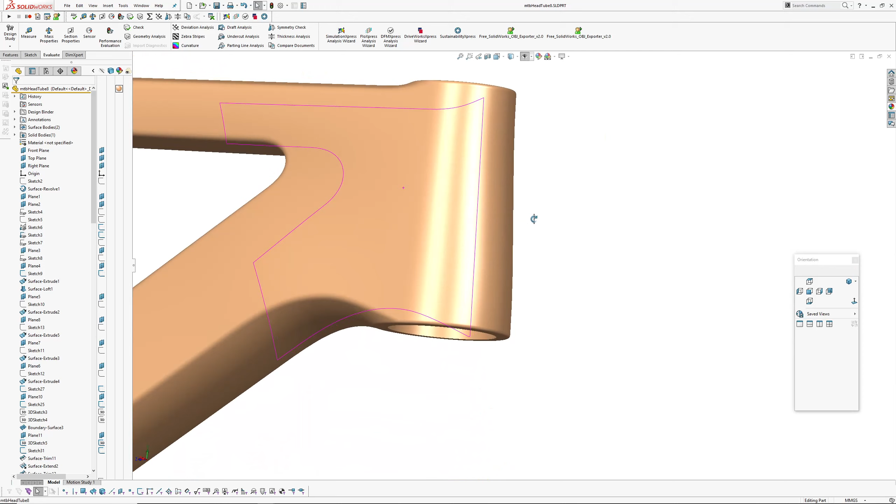Another video continuing my recent series on blends and transitions, covering different ways of doing things. I had a question from someone online about combining a bunch of techniques together, so I've dusted off this old mountain bike head tube, top tube and down tube exercise that I've been dabbling with for a few months, and never actually sat down to flesh out properly.

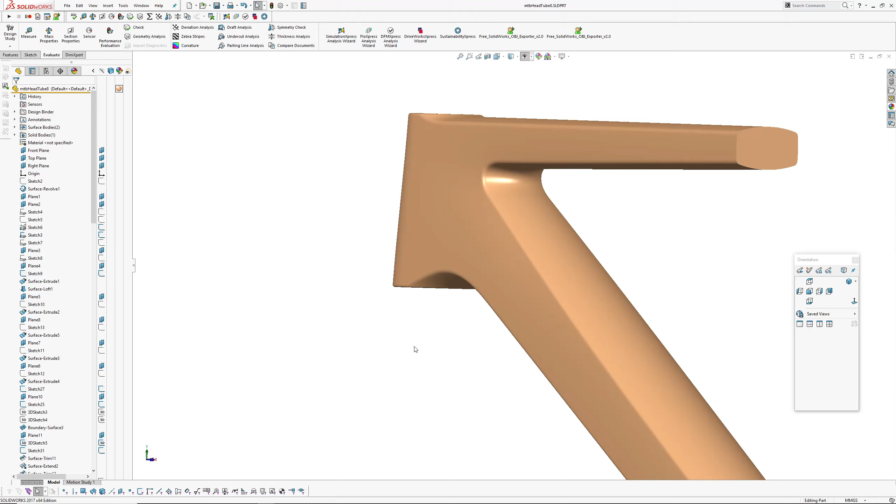I've got a series of models here showing the process I went through to achieve this result. For people that don't ride mountain bikes, the new standard most mountain bikes have is a tapered head tube, 1 1/8 on the top and 1 1/4 or 1 1/2 on the bottom, I can't remember exactly. So you've got this tapering hourglass shape at the front, and then your top tube and bottom tube, blending everything in nicely together.

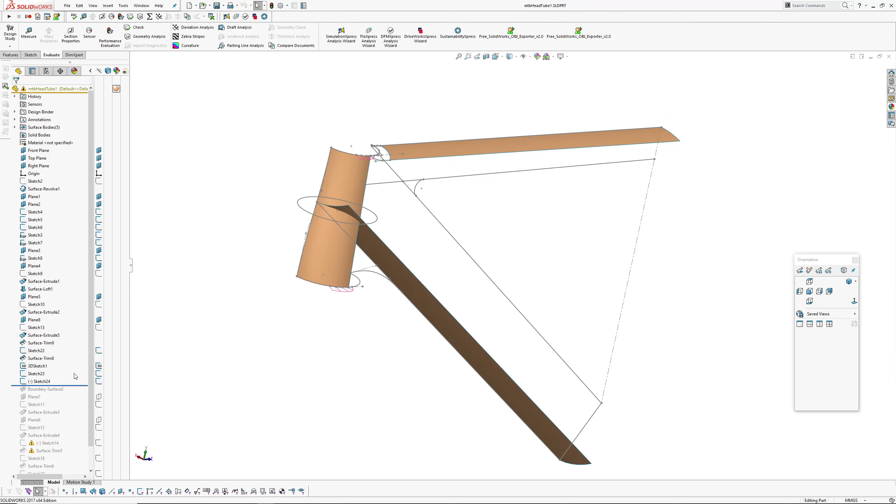As you can see, I'll roll through a few files here and show some things I tried doing, things that didn't work. There you can see the patch layout. I'll roll up to the top here and cover a few things.

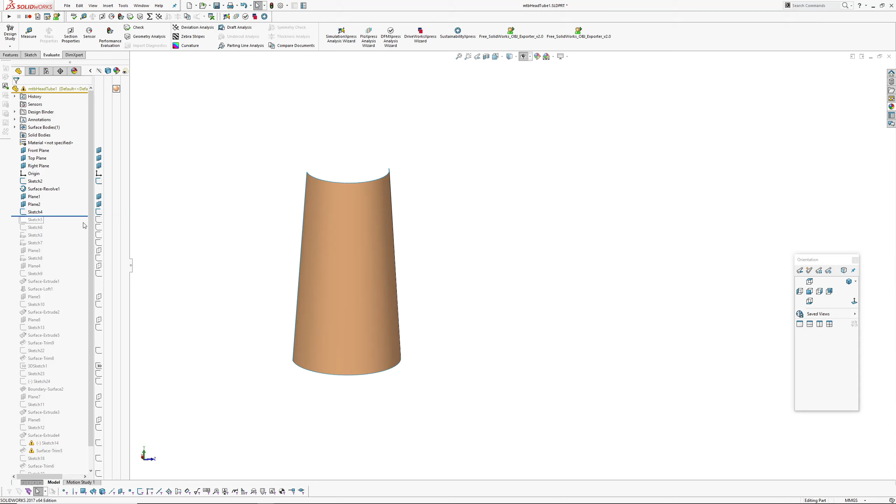So I created a revolved surface, which is my main surface for the headset, for the head tube. I create planes at the top and bottom, and then I've created my main layout, the centerline layout. So a bit of taper on the down tube, taper on the top tube.

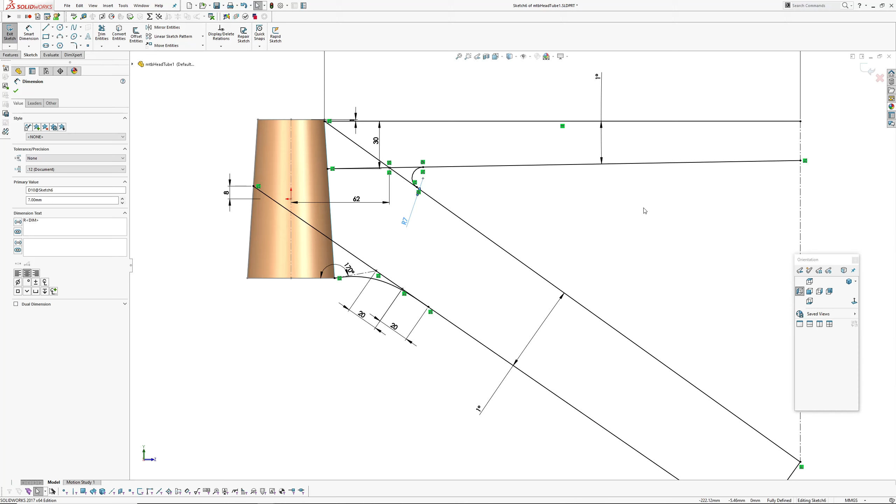Just a guide for the blend here, and then I've started creating my hourglass form for the head tube. This revolved surface here is just a guide, so I'm going to hide that. For my hourglass, if you look at several mountain bikes, they have this kind of hourglass thing going on rather than just a straight transition. This is no particular bike, it could be a cross between a Santa Cruz and something else, it has a similar look.

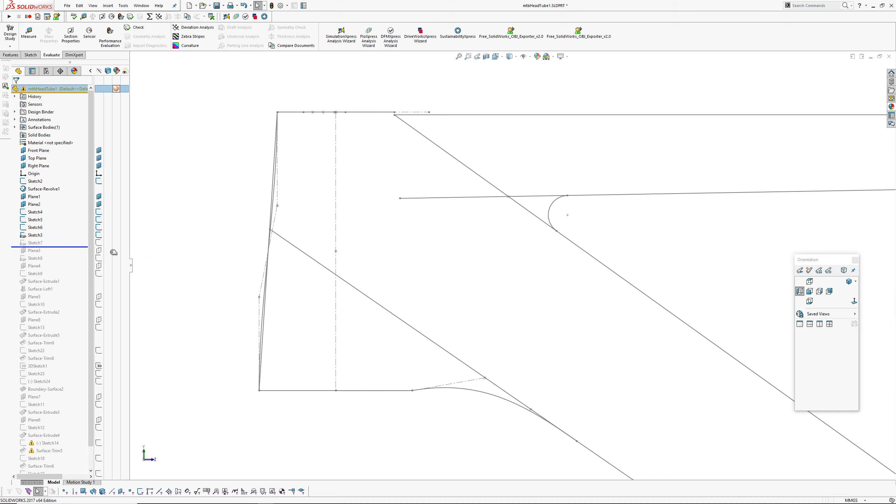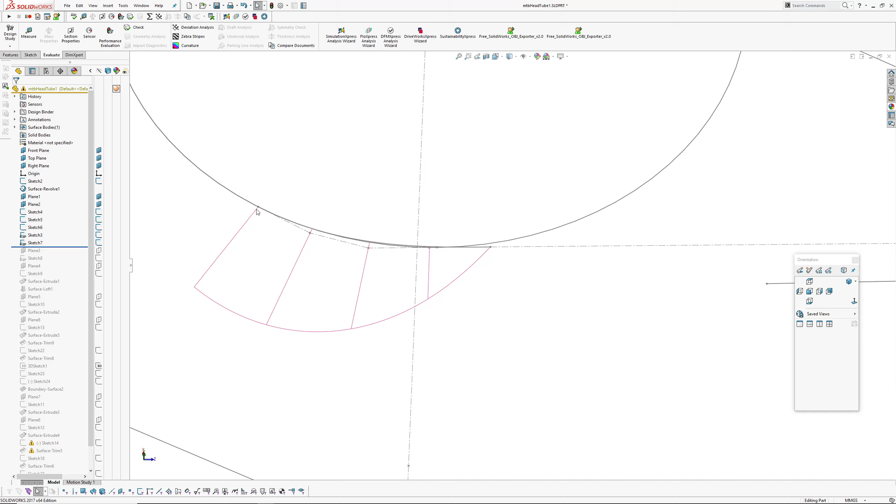At the top, I'm not just going to use a cylinder and try to blend in with a tangent, I want to make a curvature continuous join. What I've done, if you've watched any of my other videos, is have an arc and blend that arc to a line using a style spline. That style spline, if I select it, is a degree 4, so it's got 5 CVs, curvature continuous to the arc.

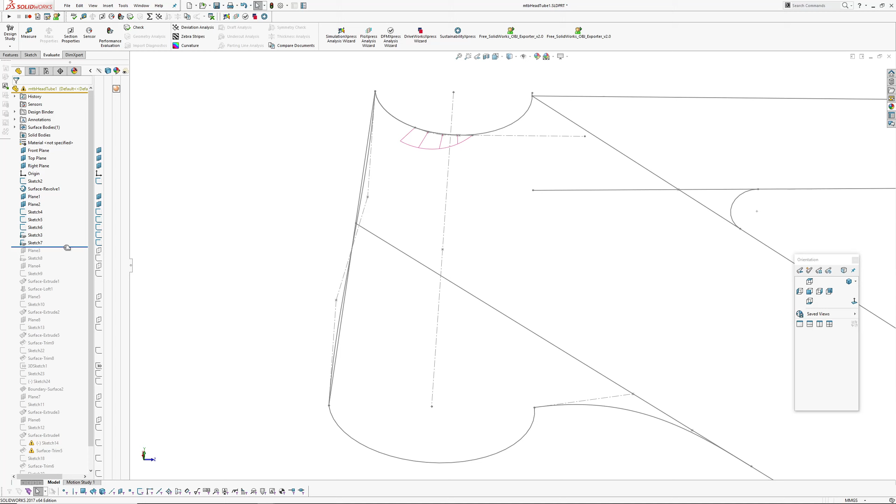So I've got 1, 2 points taken up with the curvature continuity on this end, and these control polygon segments are collinear with my straight line, so they're horizontal. Then I've done the same thing at the bottom. You can see I'm going to create a surface between those two, so there's my planar surface where I want to create a blend.

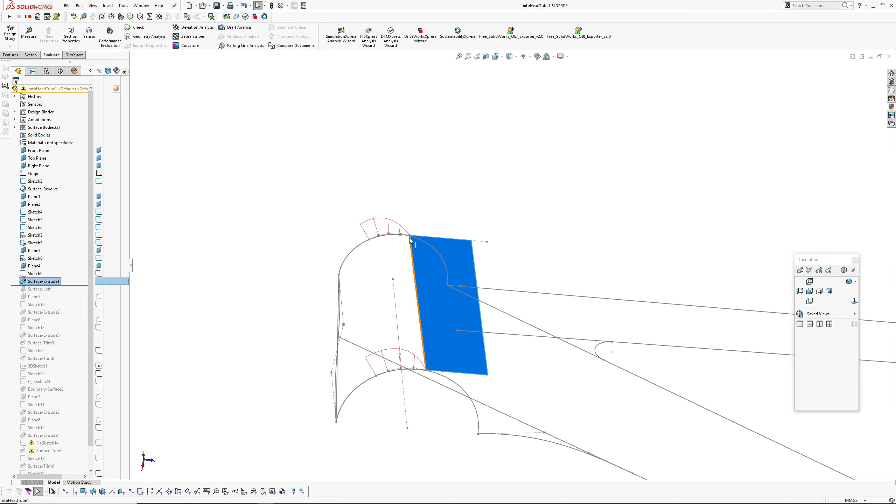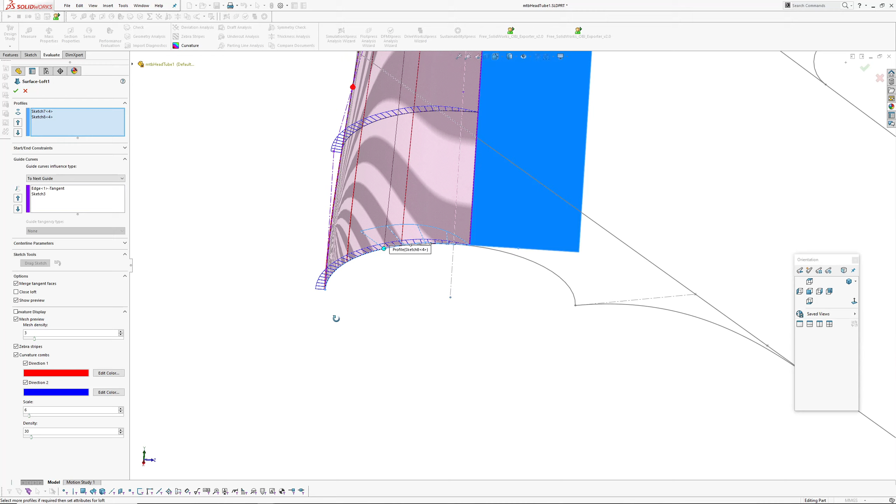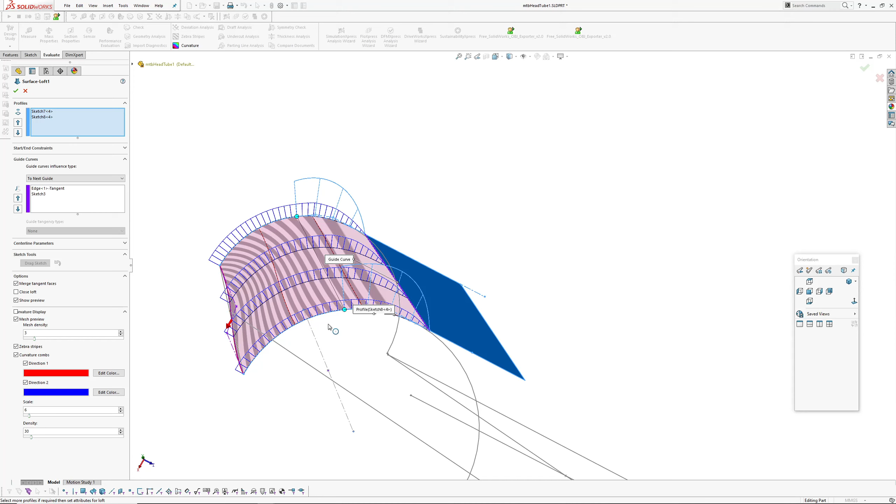So we can go curvature continuous. The curvature you can see with the graphs there is dropping to 0 where it hits the planar face, and this section forward of the graph is an arc. I've just created that with a loft. On one end we've got this hourglass thing going on at the front, and on this end I've got my planar face, and the curvature is coming around as an arc and then dropping to 0 — well, approximately an arc because I've got an hourglass form here. Right, I better speed up.

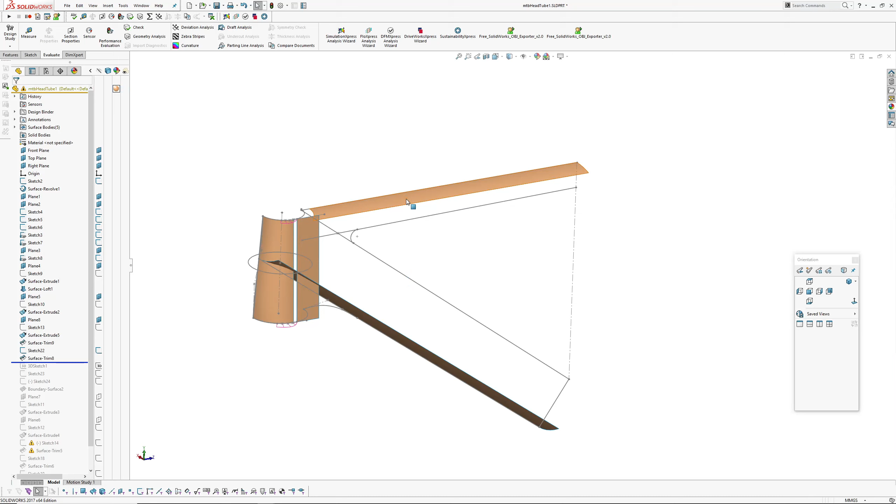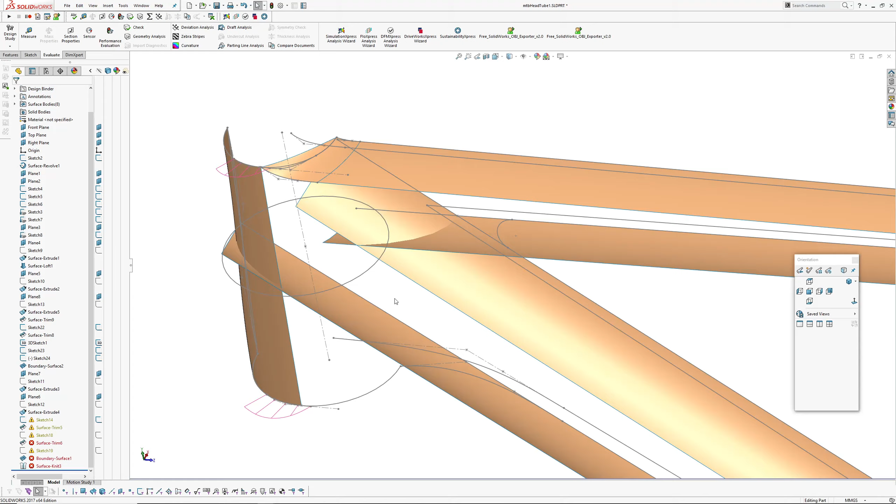Now I'm just going to extrude some surfaces — top tube, bottom tube, main faces, which are just crowned. So this first version, I had grand plans of making these surfaces here and creating the blends and then patching everything in. But it turned out to be a bit of a grand failure doing it this way, because I've got to transition from here through to two branches, and it's all over the show.

I haven't actually intersected my primary surfaces first before I started trying to get this blend going on, so I figured this was not the best way to do it. So that's where I moved on to version 2, which you can see is quite different. What I've done is decided to create a larger overbuilt surface that gets trimmed back, and I'll go through this.

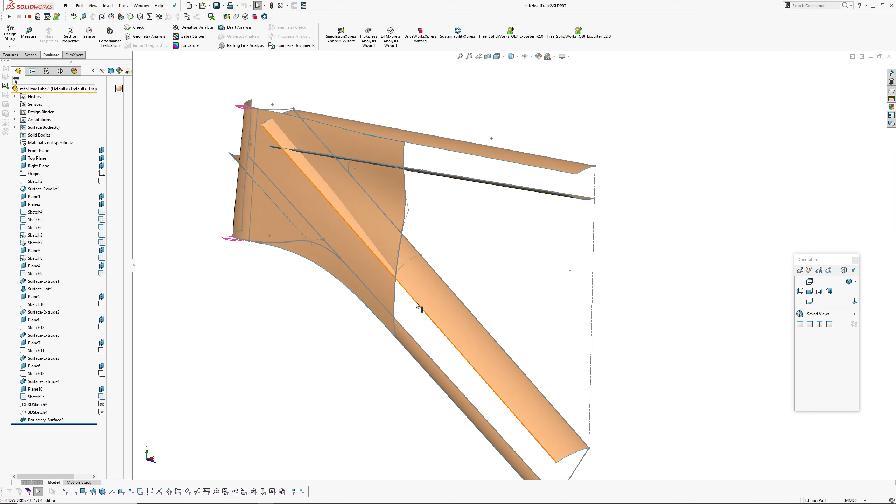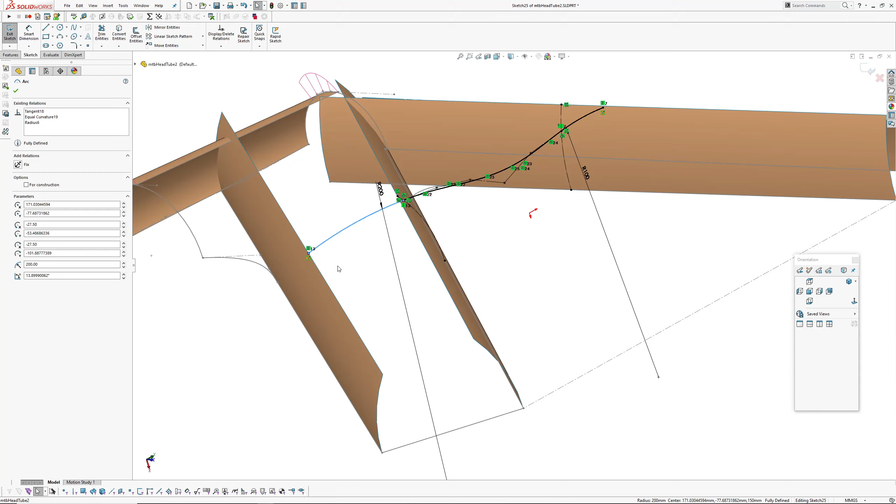So I've created a plane at a point. This is an offset from the front plane, and then if I go into the sketch here, I've got an arc for the crowning on the down tube, an arc for the crowning on the top tube, and then I've joined them together with a degree 5 style spline, curvature continuous on each end to the arc,

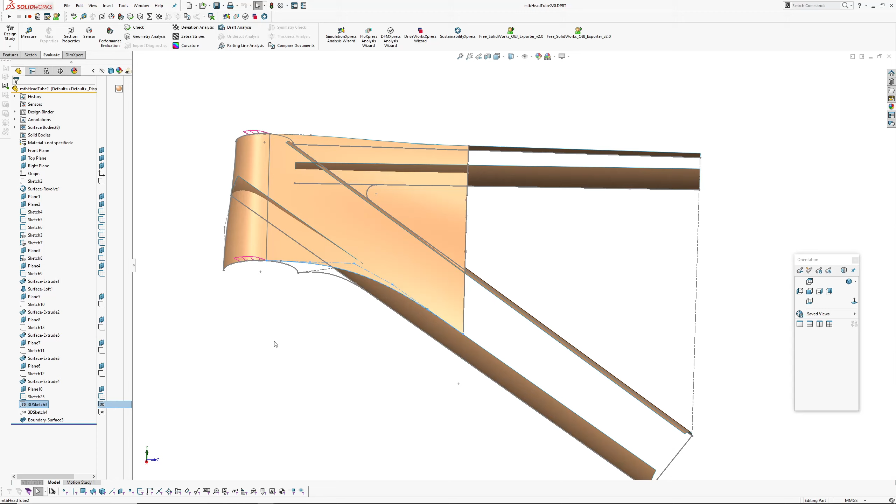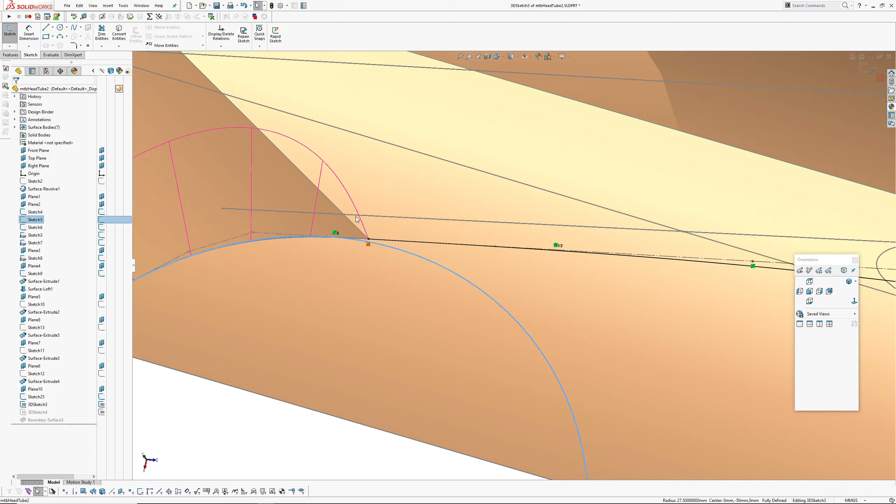and then created some side profiles to blend, because what's going on here, I'll show you. So this is the arc. If this was a true revolve right round, so there's this section of arc segment there, and then I've got a curvature continuous blend running it out so I can run straight back from this point, because if I just chop the arc here, I'm going to end up with a tangent connection.

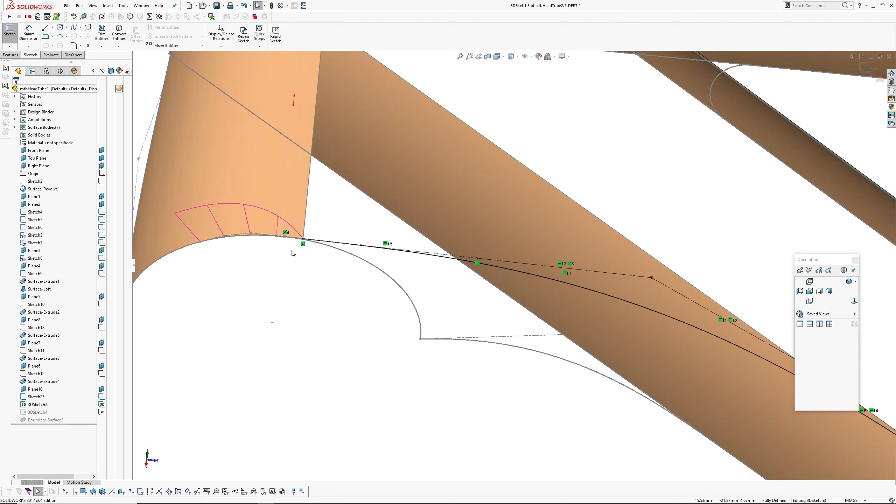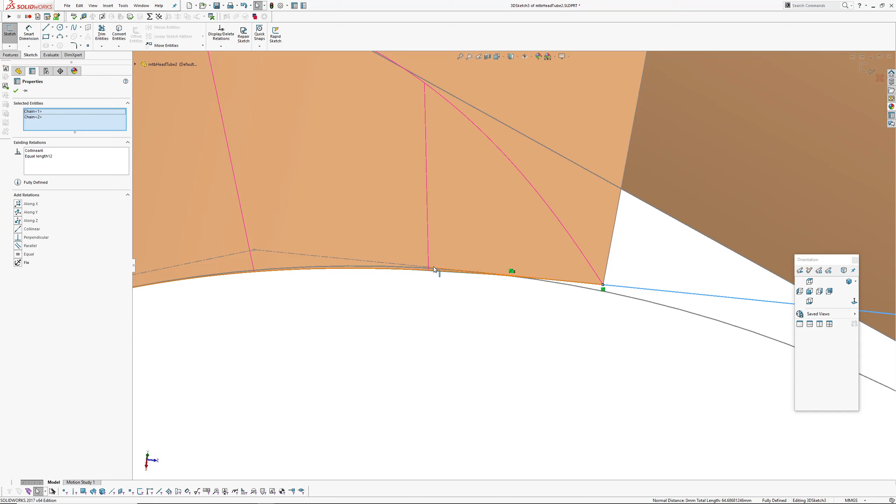So from this surface, which is the loft I created earlier, I've got a 3D sketch with a style spline on it, degree 5, 6 CVs, curvature continuous at this end, and by making it curvature continuous, I haven't actually used the curvature continuous constraint, because the curvature drops to 0 on this surface. I'm also doing the same here, so these control polygon segments are collinear with the control polygon segments on the spline here, so that's straight, it's all straight. And the same thing happens here.

The side of the down tube is linear, so these two control polygon segments are collinear with the side here, which gives us a curvature continuous constraint. Okay, and I've done the same thing up the top, as you can see. And then yeah, I just made a boundary blend. So, whoopsie.

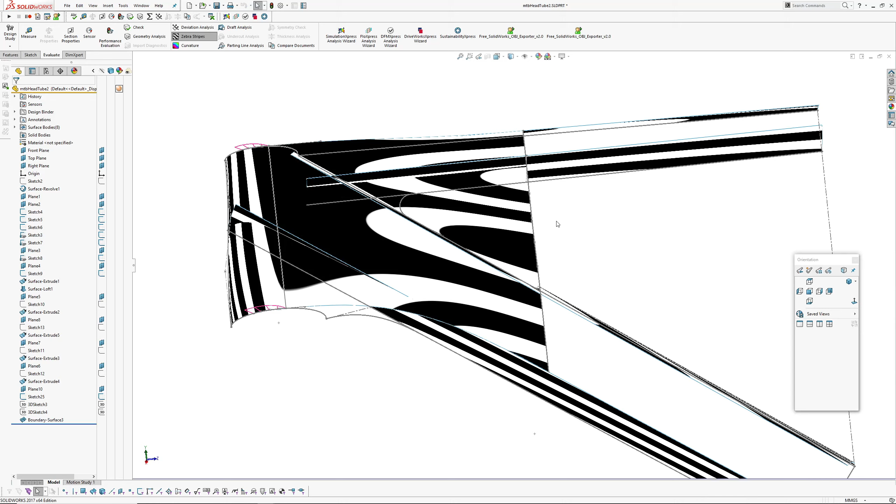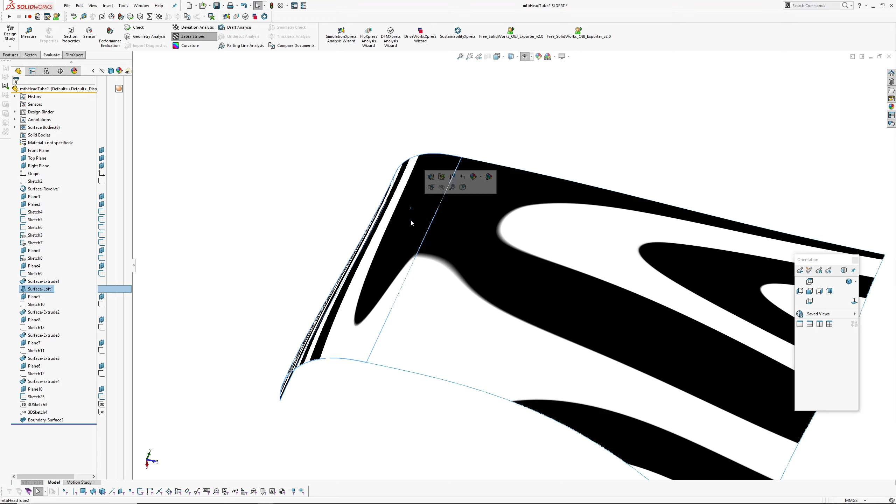So that appears to be, trying to read the zebra stripe there, appears to be curvature continuous to the head tube surface. So the idea would be then to trim out this section here. Right, I'm going to go on to the next file now.

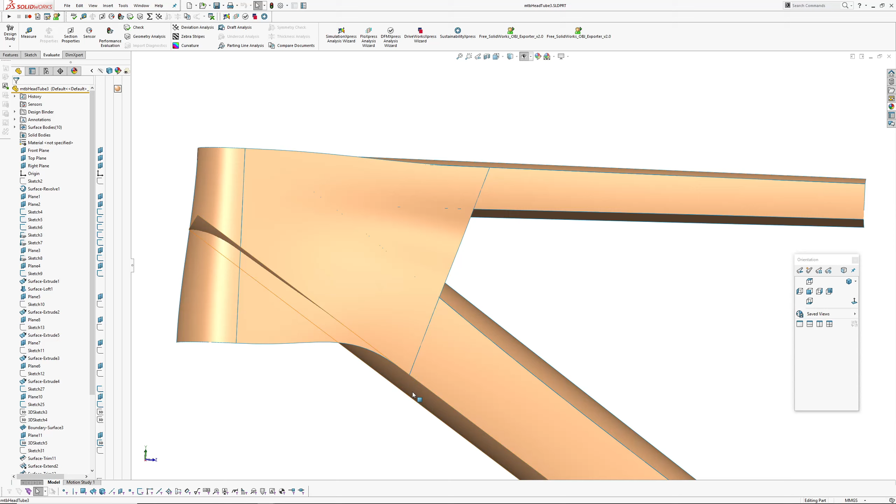So what I learnt was I don't want to have that surface as in the previous file. It was vertical here. I want to get a bit of angle here, so we're not such an acute angle to the down tube. So I've redefined things down the bottom of this tree, but it's pretty much the same. This end section still has crowning on it. So after I did that, I'm going to put in the side surfaces of the down tube and the top tube.

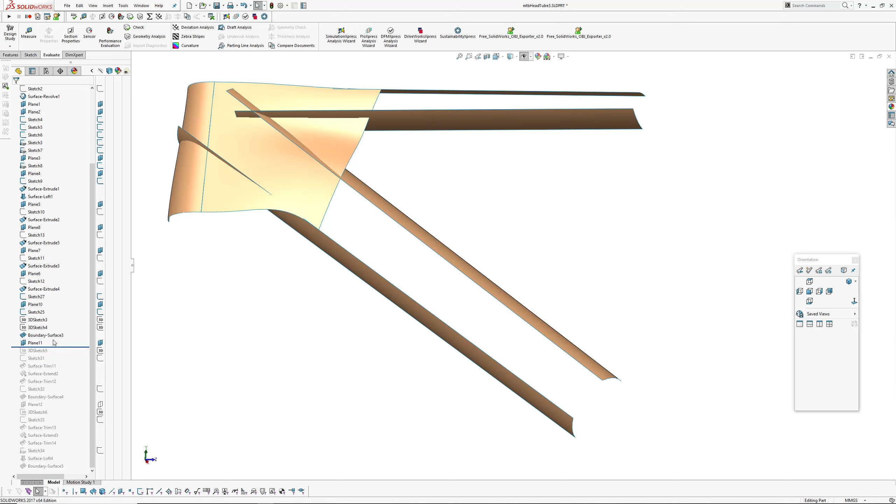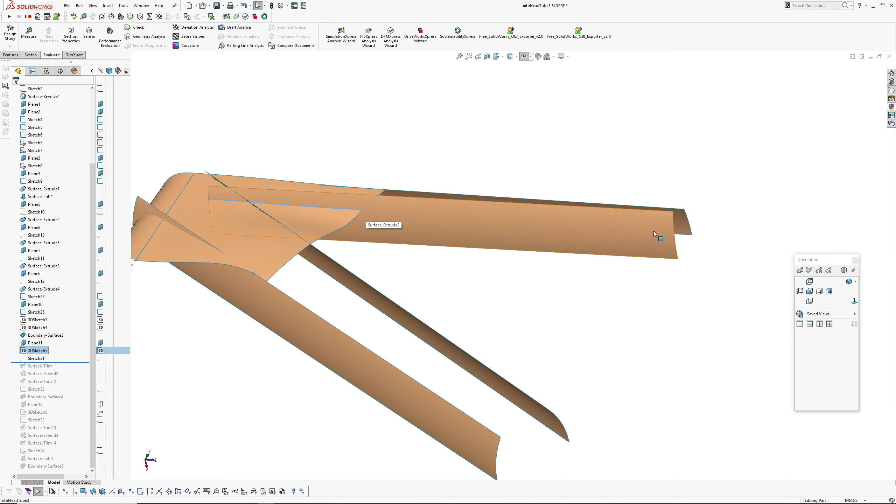So because this surface here is undulating, the bottom edge of the down tube isn't going to be linear. The top edge is linear, so this curve here, I have to define a spline through here, which is curvature continuous to a 3D sketch here, which is an intersection of this face and this face. That's curvature continuous. I've projected that down onto a plane, and then on this end it's coincident to the point on the top, because I want the top tube to be the same width by this point.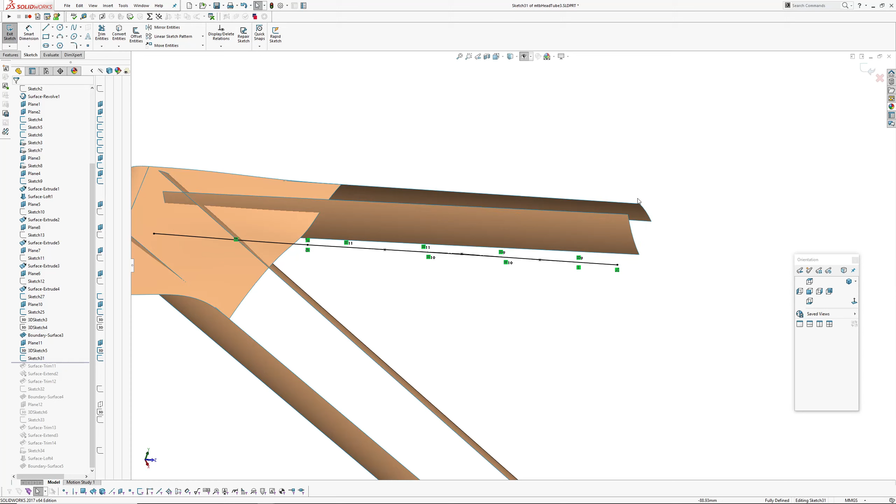Okay, and I've done the same thing on the bottom, and then I've used that to trim that surface back. I've done the same thing on the bottom. Then I've just created a crown face here, so it's got an arc on this end. And if you remember this surface here, that's got a crowning of 100 as well. It's on an angle, so it's probably not 100 exactly, but

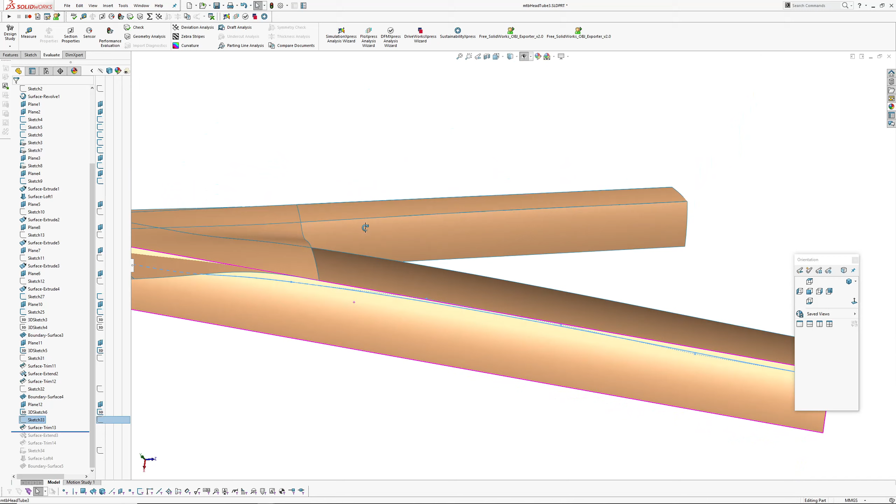okay, now I'm doing the same thing on the bottom. I've got to create an intersection between this face and this face, and then create the curve. Oh, and as you can see, this was the problem with this one. This one bellies out because this surface is too far forward at this point. So that's why my trim curve here, it's bellying out, which is not a thing we want.

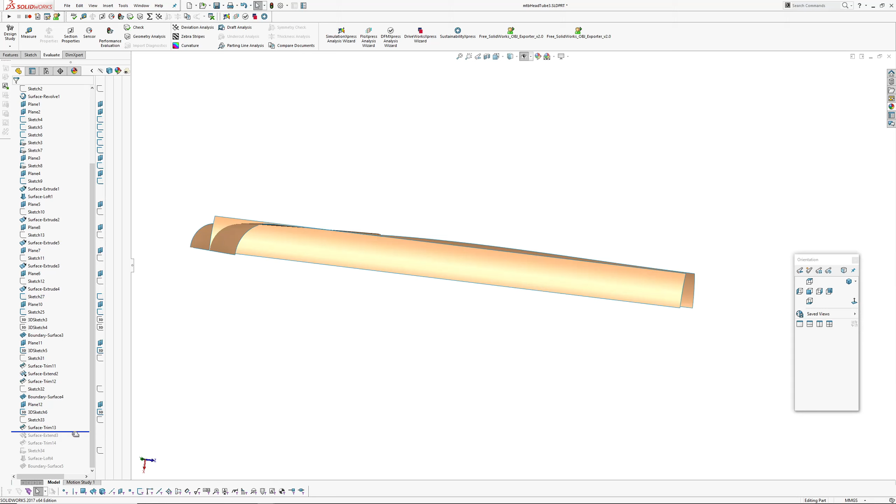So I'll go into my next file where I've updated things and got around that problem by controlling the surface and dropping this backwards. Okay, number 4.

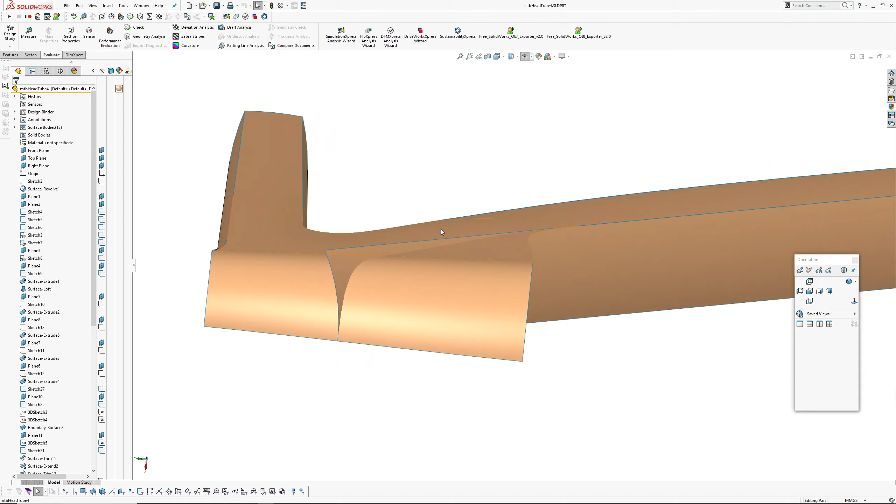So in the previous file, that surface was bellying out. I'll just turn edges on, because my big overbuilt surface here was too far forward at this point. So I redefined the sketch controlling that, so I can control the dimension here and here.

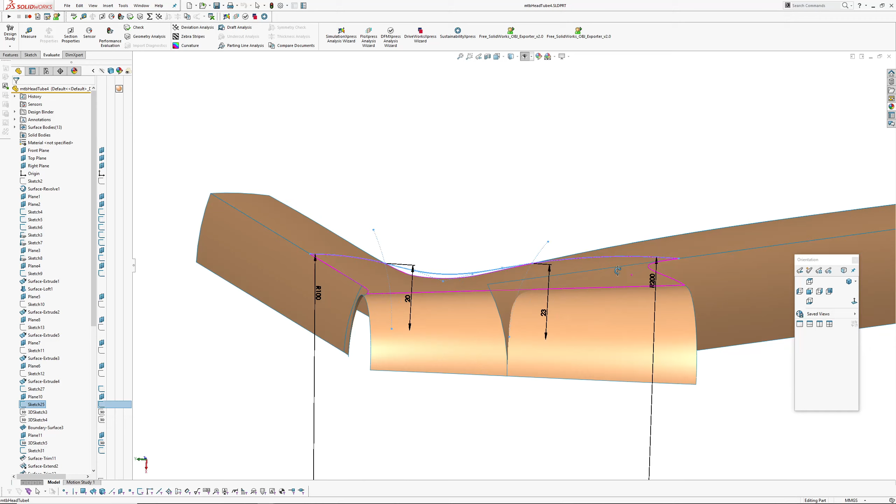So there I've got my crowning, but it's not equidistant from the center plane. So you can see the whole thing sort of drop down more, and then that has allowed this and this face to not sort of belly out.

I really must specify my recovery directory.

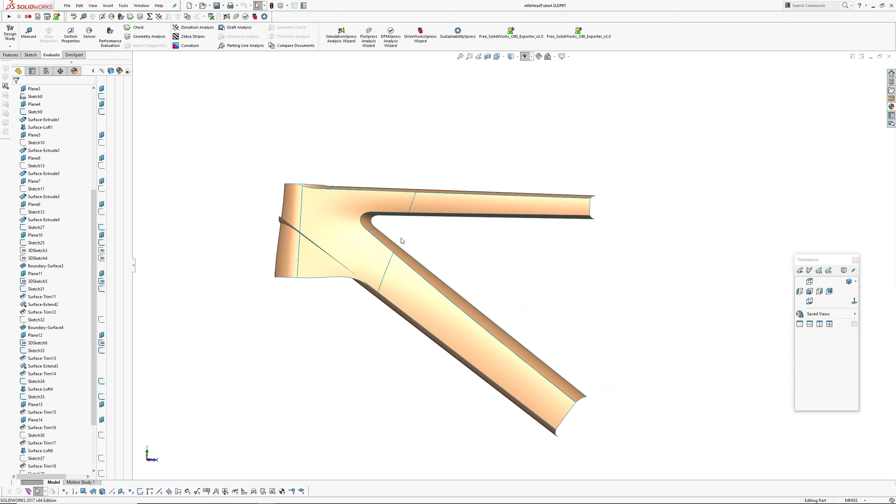Okay, what else have I done here? I've got my overbuilt surface, and I have created a blend for the center line, and then from the endpoints of that blend I've created some planes, as you can see, and then started trimming back the inner faces of the down tube and the top tube.

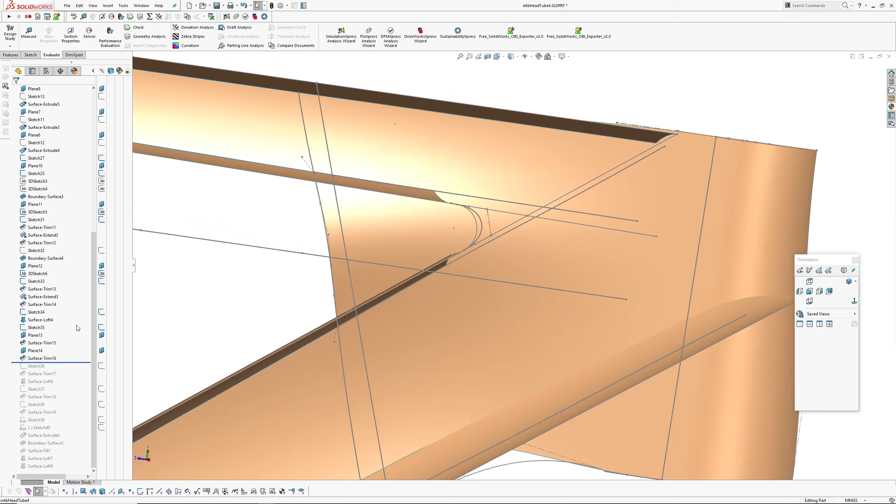And then I've created a sketch which is the outside trim, which trims back my overbuilt surface to create this elbow, and then I've created a loft in there. I tried various surfaces. This loft seemed to be the best, so if I bring up my zebra stripe, so okay, let's move on. What we got now?

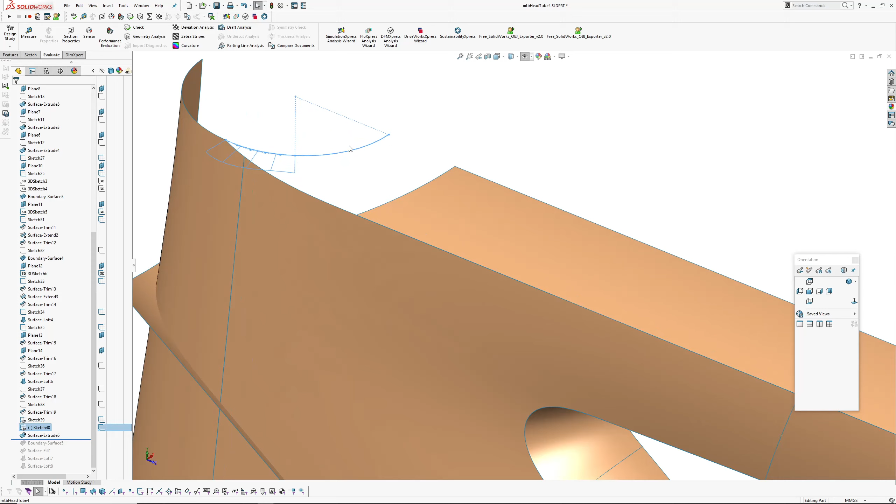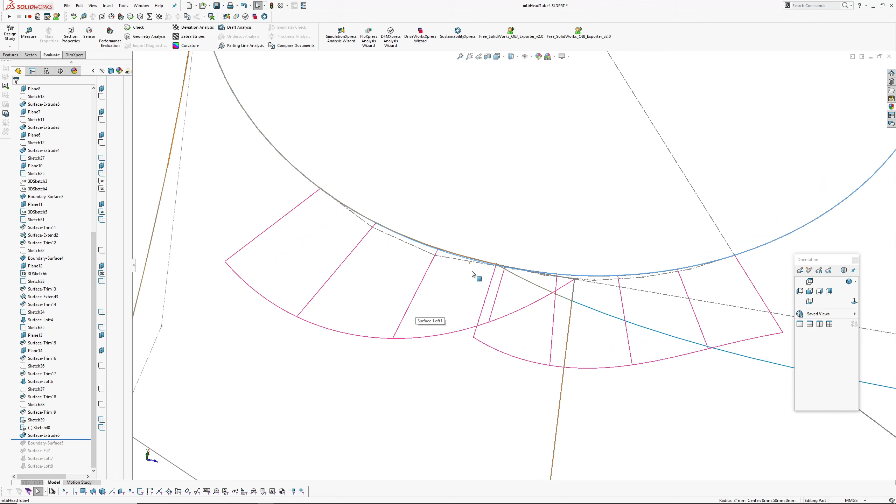Okay, started looking at the top here, trimming back this overbuilt surface, and again, what I did with the hourglass surface on the front, how it has a segment of an arc and then it transitions into a spline to go to zero curvature. I've had to do the same thing because my arc doesn't actually, there's the arc, so my surface is inboard of the arc.

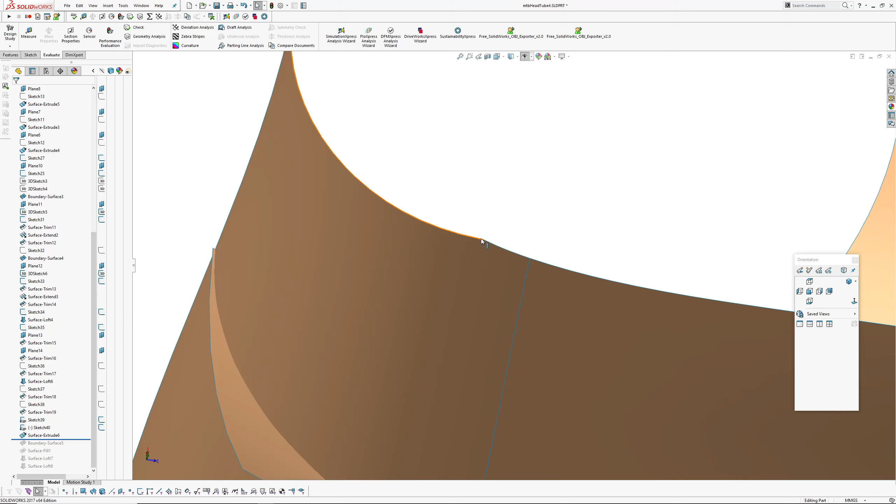So what I've had to do is create this curve here to finish off, connect the surface edge to the center line. To connect here to the center line, I've used this piece of an arc here, and then this curvature graph here. You can see there is another style spline there.

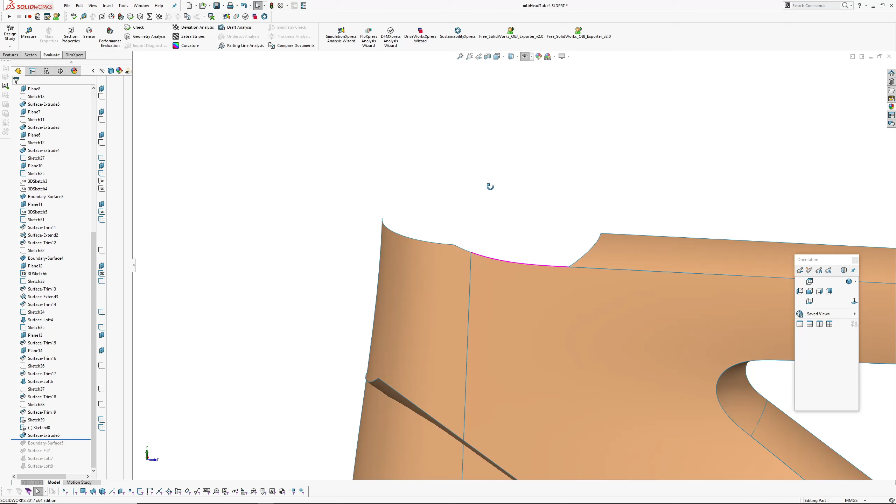So you can see I'm a slight bit off being on the arc, but I don't think anybody's going to notice. This is going to have a fillet over it, and then it's going to have a headset cup over the top. Okay, so for this version here, I tried running this in this blend in one go, but this is a four-sided boundary surface, and obviously having such an acute angled edge here isn't really best modeling practice.

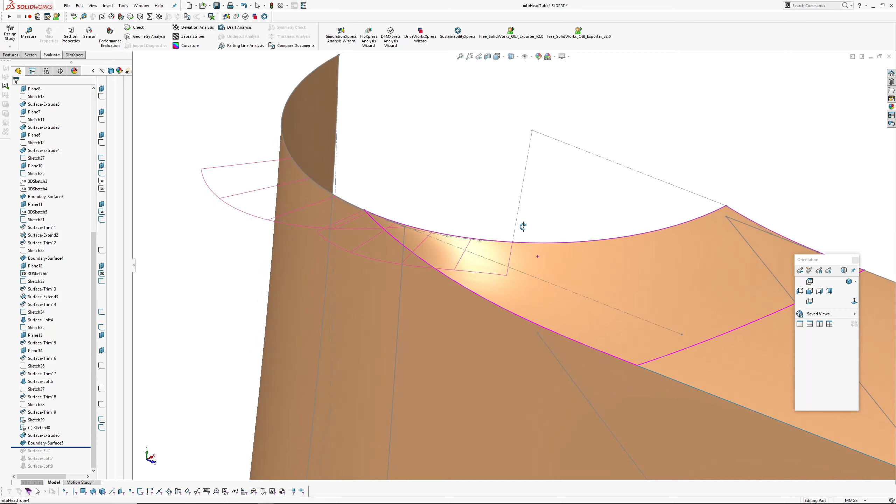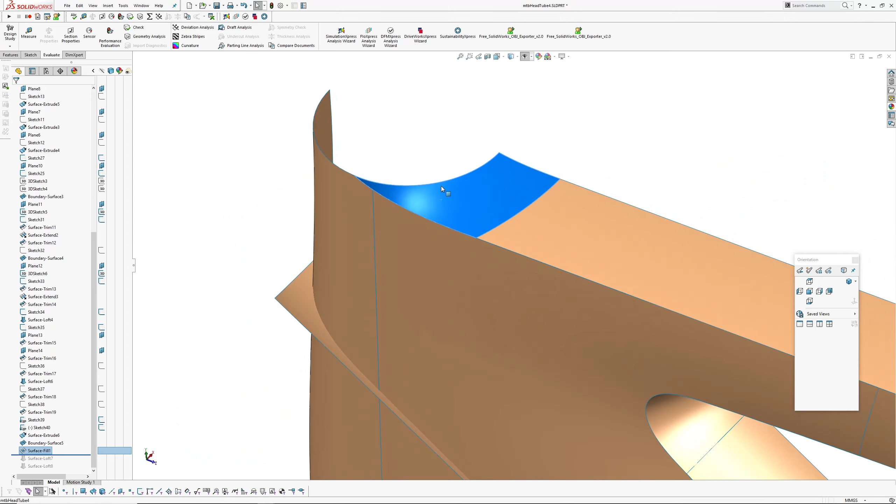So I tried doing it as a surface fill, which worked okay, but then I'm trying to avoid using surface fills. So my next step is doing this out of four-sided boundary surfaces, but breaking it into two surfaces. So I thought, okay, I'll build one boundary surface here where everything is fairly even. You know, there's no drastic acute angles on the corners.

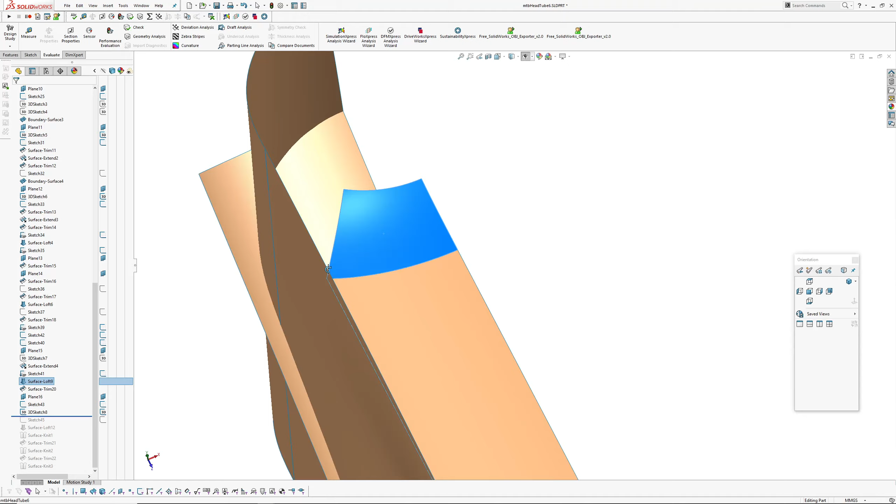And then the idea was how I'm actually going to get this triangular patch built, which takes me on to the next file. Okay, so what I've done is I just roll back. So there's my four-sided surface from the previous model. Then what I've done is created a plane through the end of this spline where it finishes here.

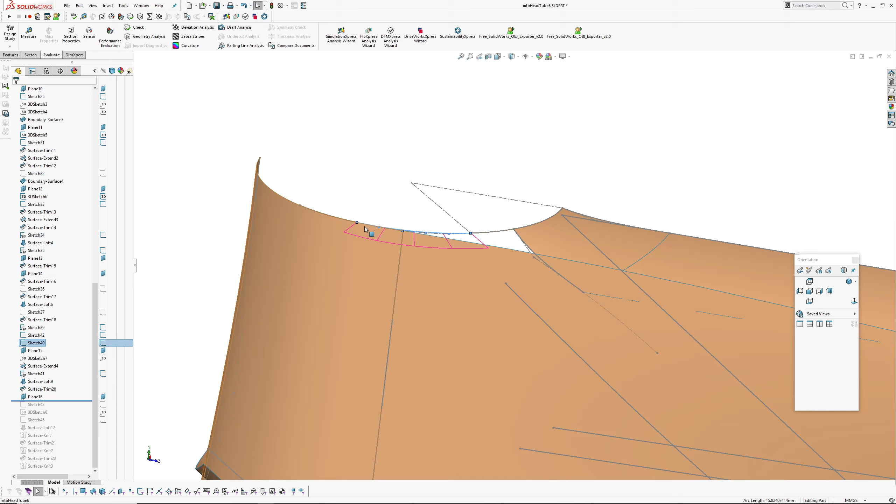So I've decided, instead of explicitly trimming this back and having a surface there, I'm going to build a four-sided surface that projects through these two faces, and the trim will be resultant. So that way I get a four-sided surface that isn't pinched or collapsed down to a singularity.

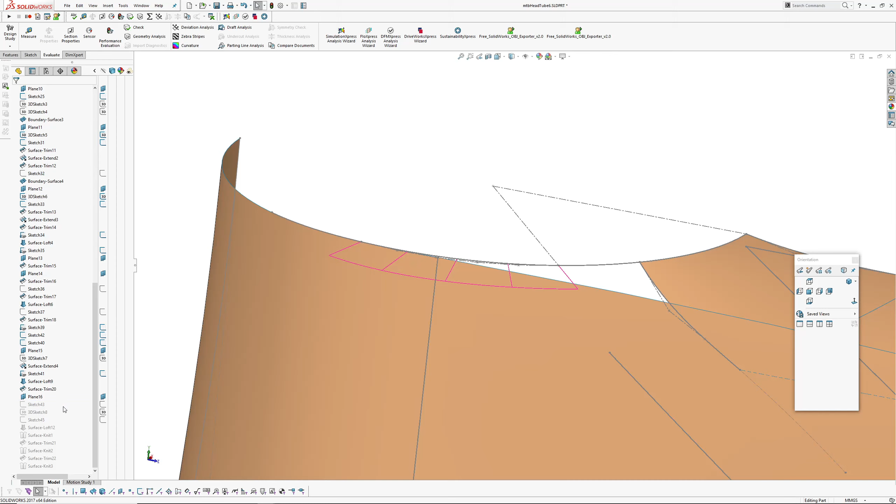So I've created a plane through the end point of this spline here, and then I've created a piece of floating geometry, so a spline that I can tweak to try and tweak the shape of this four-sided surface I'm making, overbuilt four-sided surface. And then I've created the outside boundary, so you can sort of see where I'm going here. I'm going to create a surface with these four boundaries in here.

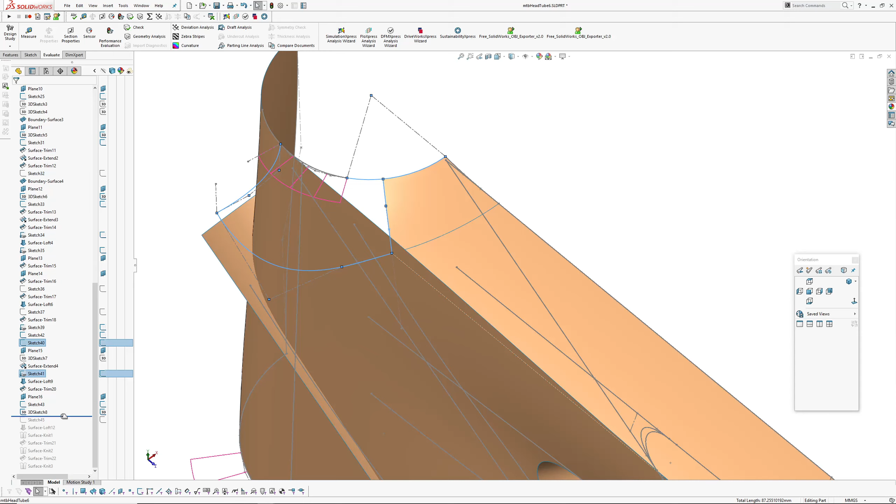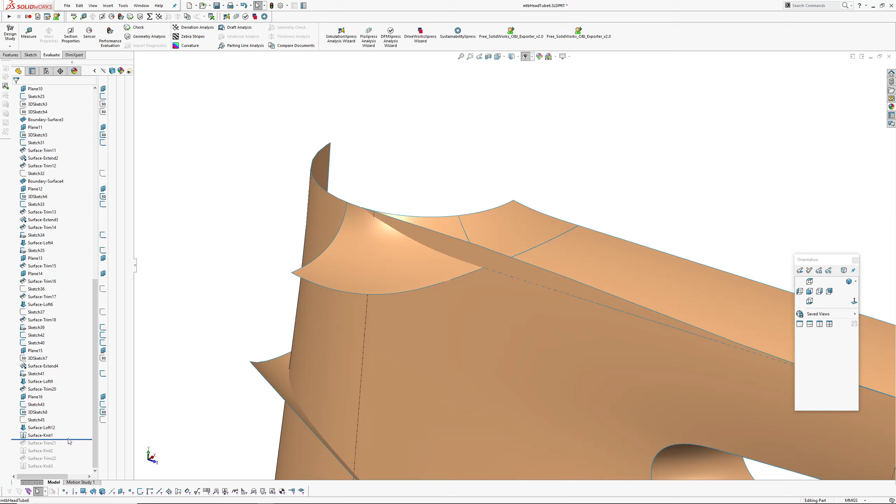So there's that. And I have tweaked angles and what have you, to sort of tweak the resultant trim. Okay, and then I just trim everything with each other to end up with this curve here. And because this is an overbuilt surface, it's not nasty having it come down to a point like this, because the actual untrimmed surface is rectangular with no acute angles. Okay.

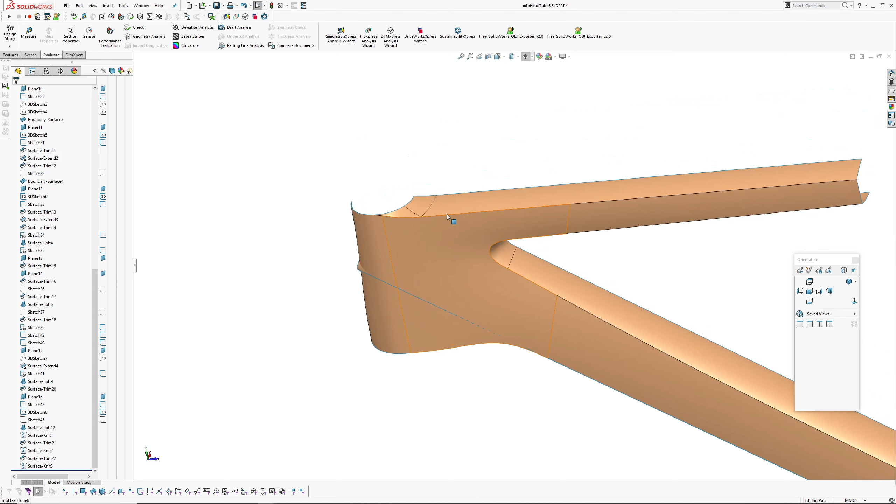Now I'll jump through to my last file, which covers the bottom. Oh no, it's my second to last, sorry. Okay, so the bottom was pretty much a similar type of construction. I've created this curve here, which is way up the top in my side elevation control. Created a plane through there, the end of that spline, which is used to trim back the underside surface of the downtube.

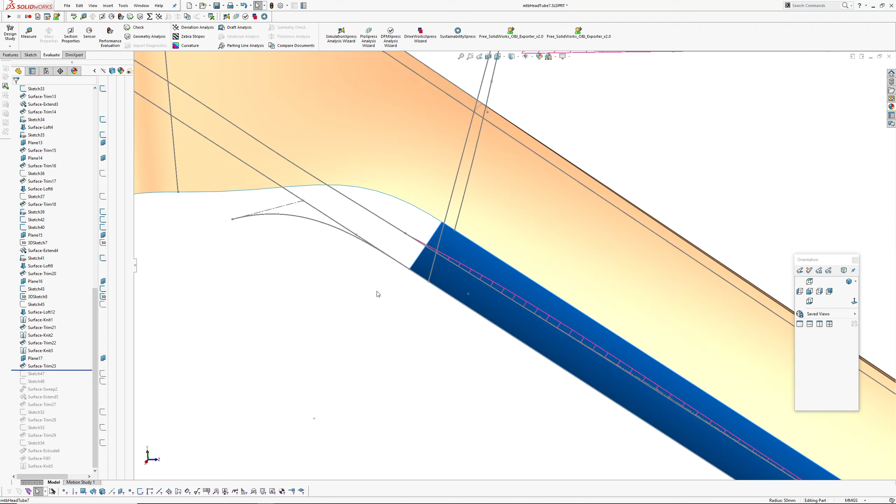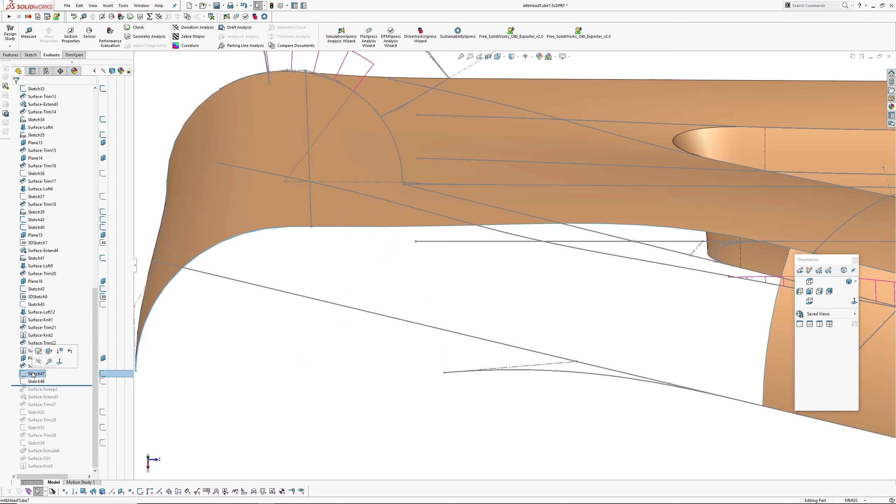And then I've done what I had to do on the top here. I've done the same thing here in this sketch here. So I've got a piece of the arc, which I've set back from the front plane, which is the axis of rotation, is the front and right.

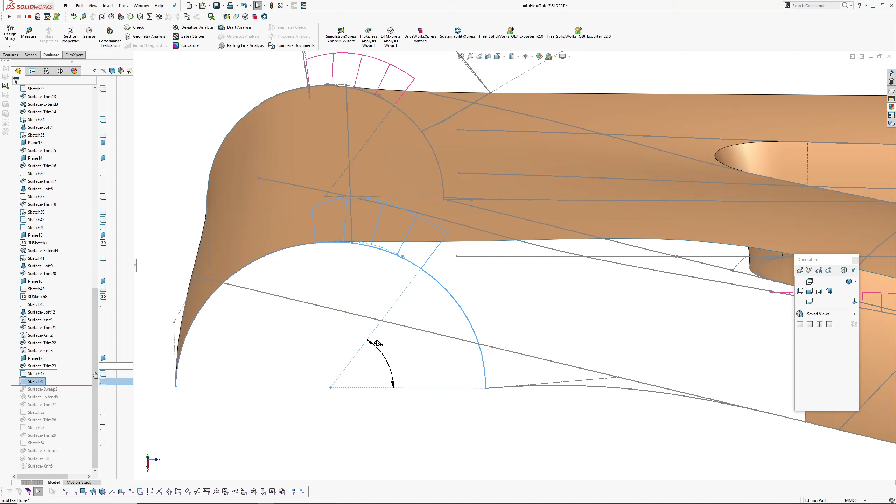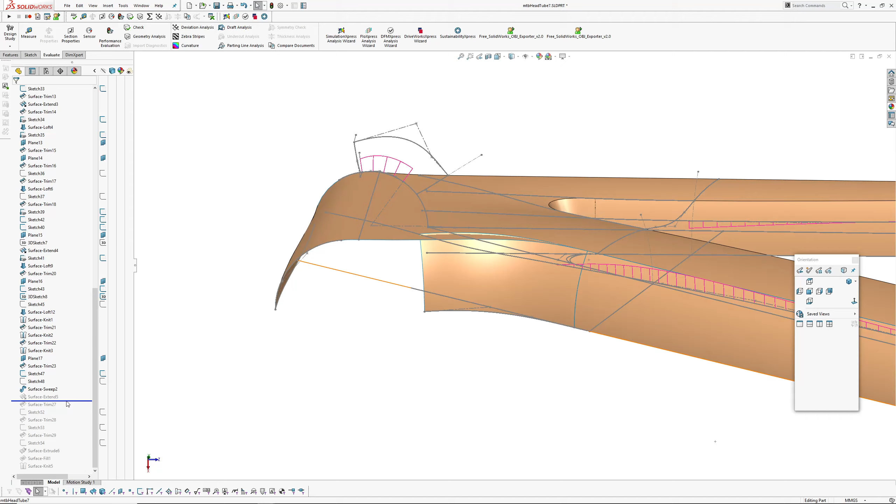And then I've created the style spline, so I'm curvature continuous to this piece of arc and this piece of arc. And then I've swept this profile, the crown profile from the underside up along this style spline here. So the curvature, it's all equal. So it's 50 millimeter radius. Then I've extended this surface out and trimmed it.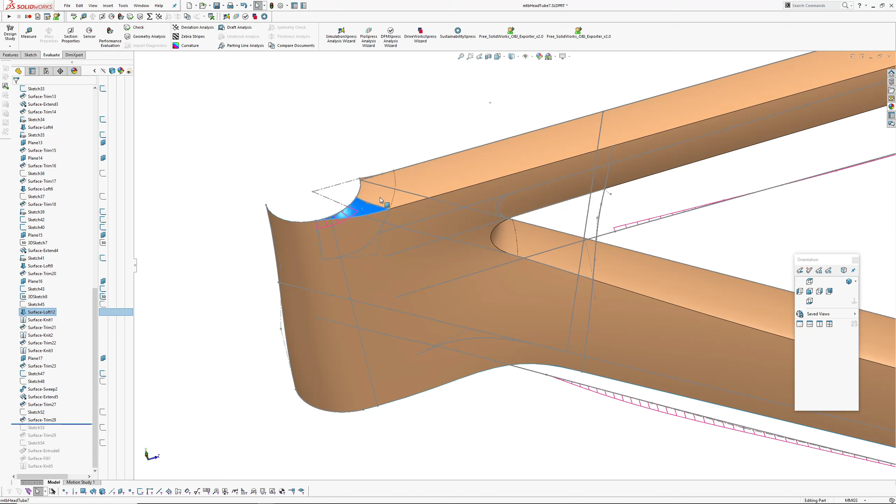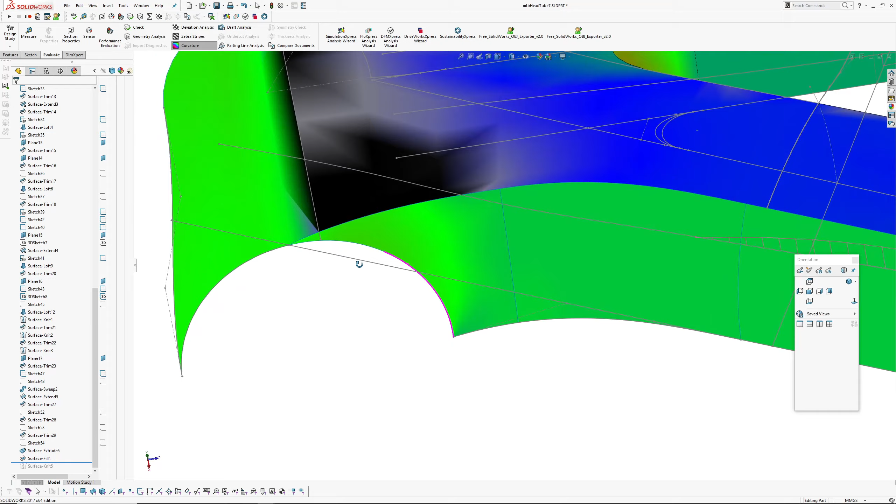So now I need to create this blend here. And again, I'm going to use the sort of resultant technique that I did here so I can end up using four-sided surfaces. Oh, hang on. Yeah, this is my first attempt where I tried the old surface fill there. So that's probably sufficient, but I'm going to add radiuses to the edges here, and I prefer not to use a fill surface. I mean, that's not too bad. You can see it's not a tangent connection there because there's a kink.

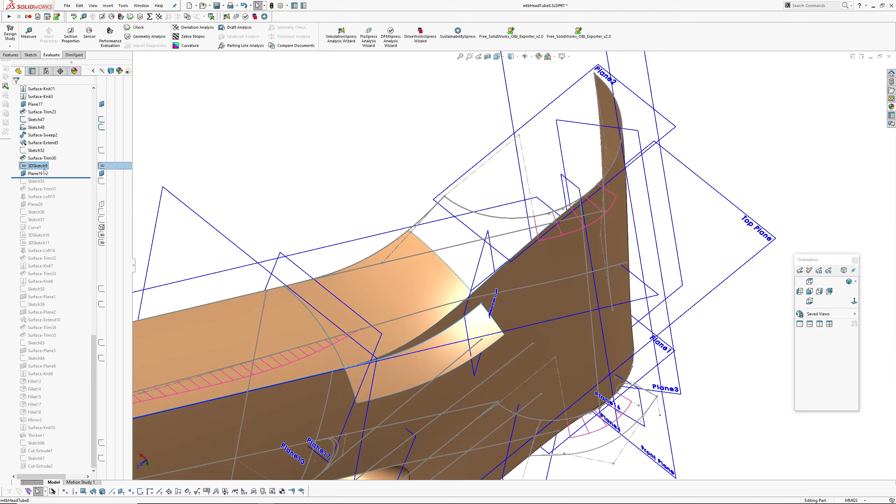Okay, so I'll go into my last file here. So version 8, just roll back before these fillets and show you how I built this, pretty much the same as I did the top. Four-sided surface there. Sketch on this end here. I have to make it tangent to the surface, so what I've done is extended the surface out, as you can see, and I've created plane 19, which is perpendicular to this arc segment and coincident to an intersection here between the surface and the surface.

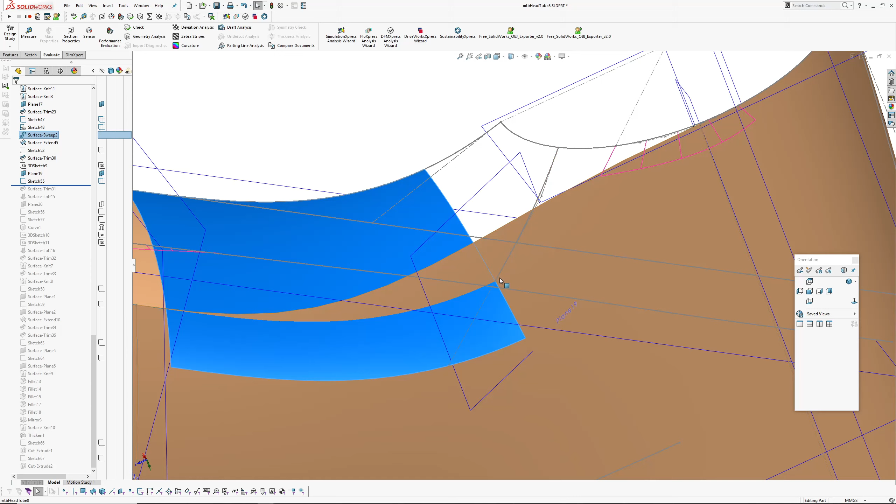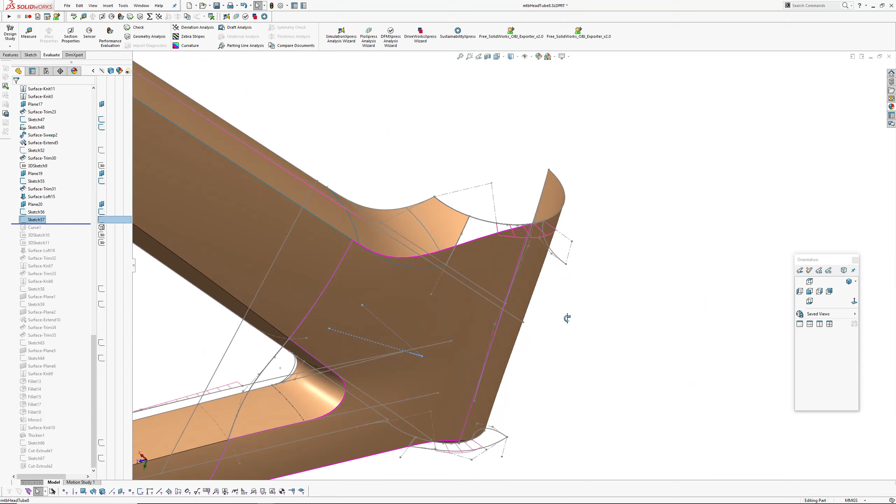Created a sketch with an intersection curve through this face to make it curvature continuous there, and trimmed, added this loft, and much like the top, created some geometry hanging in space because I want to create a four-sided surface through here. So there you go. You can see my boundaries: 1, 2, 3, 4, and there's my surface. So now we're just going to trim things back.

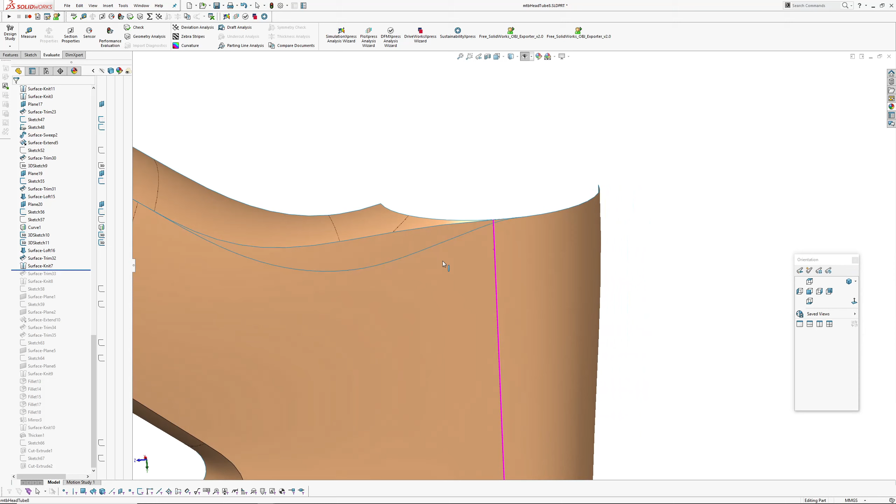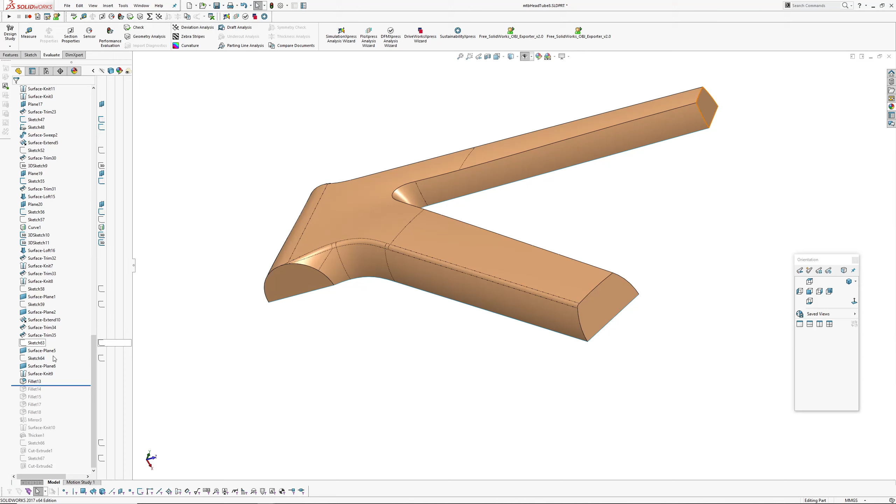You can see the resultant junction, which I've tweaked a bit by tweaking these sketches. So series of trims like that. Hey presto. Okay, now I'm just going to cap things up with some planar faces. So I've capped the ends and knitted everything together. Now I'm adding the radii, the fillets on the outside. So this is curvature continuous fillet, radius 4. Same on the top.

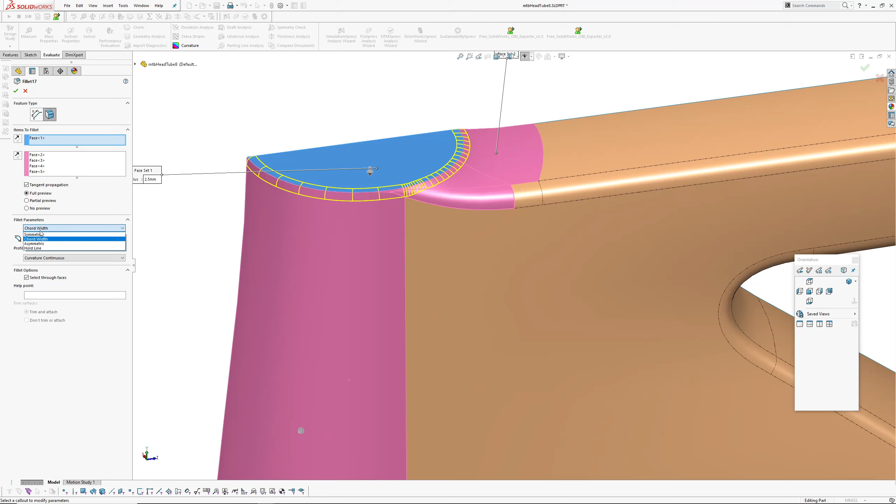Same on the center. For here I was going to sweep a pipe around here and then rebuild the surfaces in to get a nice equal distance blend off the rail, but if you use face fillet, you have the option of using chord width as the input. So if you go symmetric, you end up with this wobbly stuff going on, which is what I mean why you'd sweep a pipe along here, because if you sweep a pipe you get an equal distance off the edge.

But luckily, with face fillet, you have the option to pick chord width, so it's much more even. It's not perfect. It's not as good as sweeping a pipe along there, but yeah. And same on the bottom. And then I've just mirrored the surface over, thickened it, and cut the head tube out. Okay, so this is the result. We'll just have a look at it with the edges off.

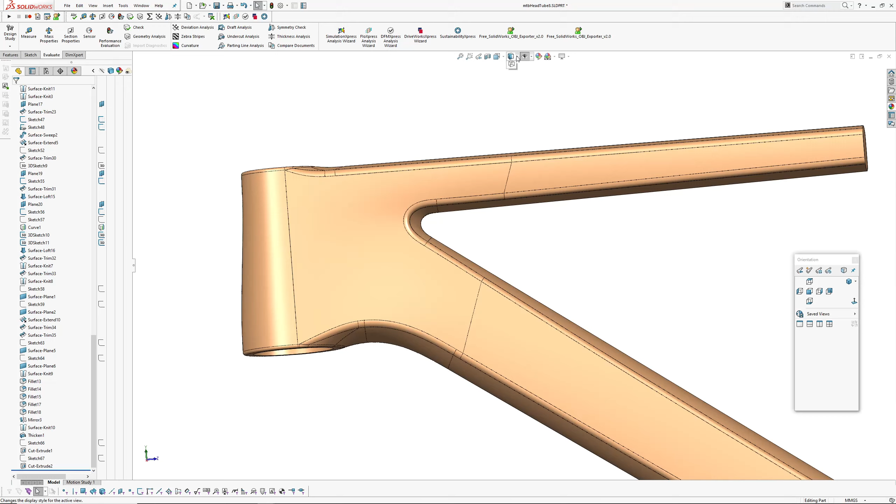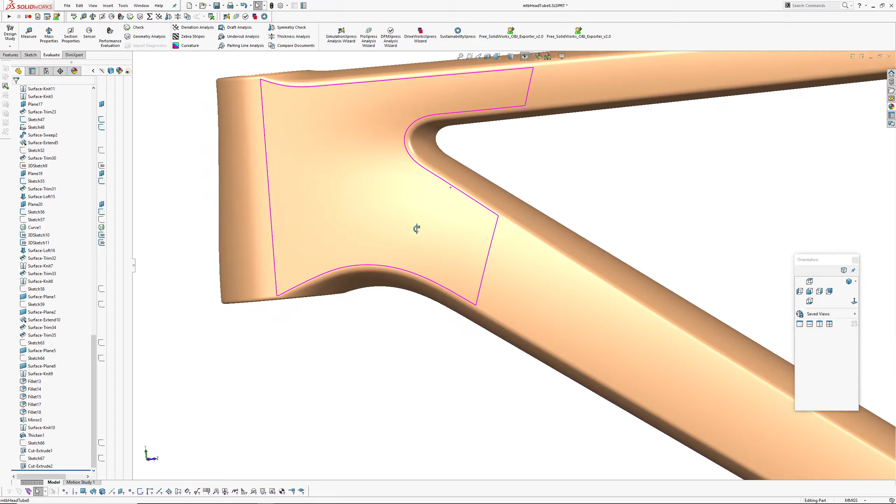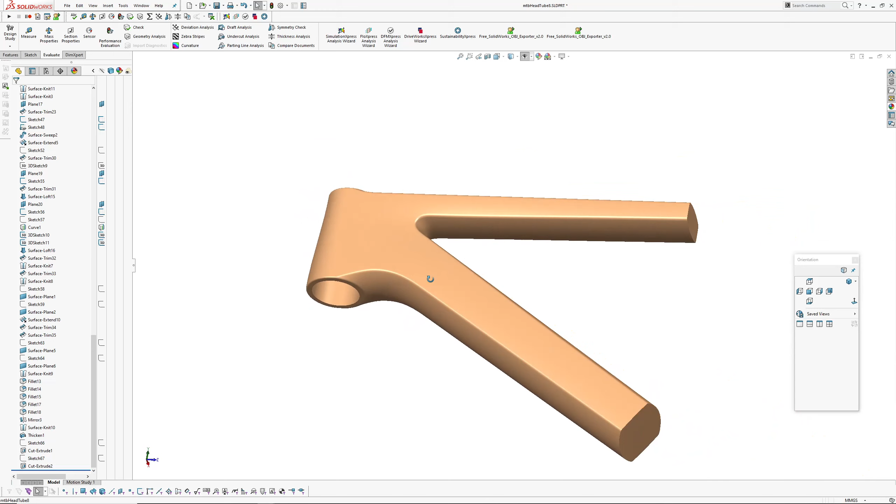So I think all in all it's pretty good. You can look along the top of the down tube there and you can see it running into the blend there, into the taper, and then around the top, and along the top there. Looks fairly smooth. Yeah, so there you go. There's a more involved transitions and blends video using, you know, a real life application of multiple techniques and showing some failings.

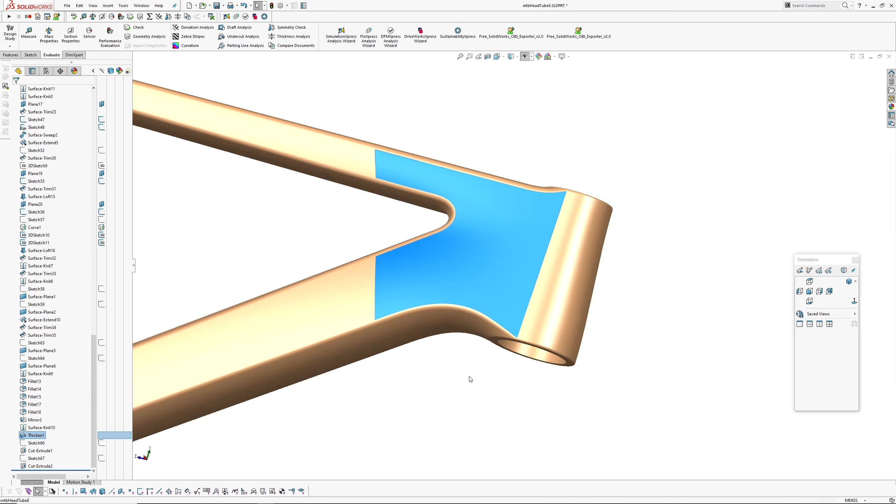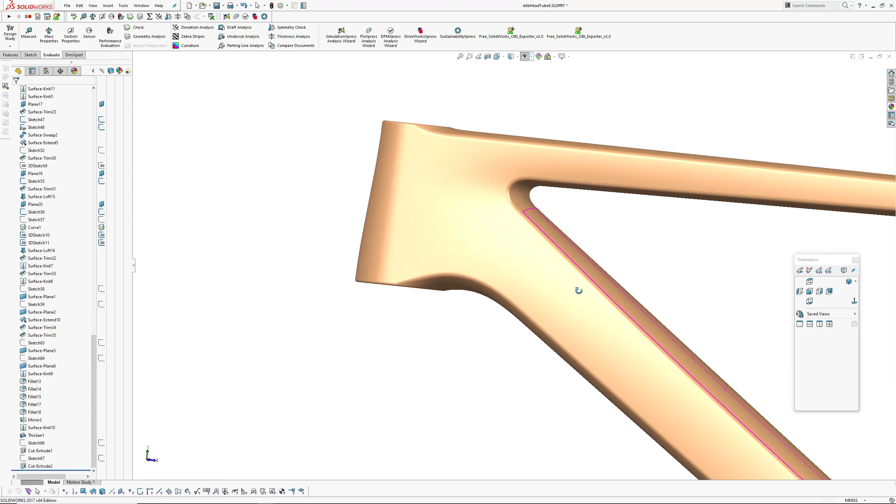So yeah, using an overbuilt surface for this area was the way to go. I think if I had tried to build this out of lots of little patches, like if I had built these surfaces first and then tried to make this out of patches, it would have been a nightmare. So yeah, I think that's something I'm starting to do more and more with my work: if you can build it with an overbuilt surface rather than doing lots of patchwork quilt stuff, much better.